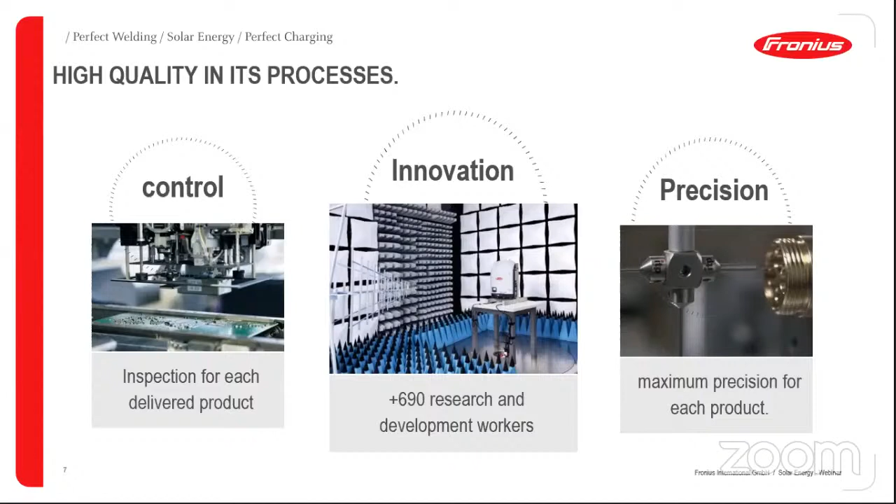So we have three very important pillars in our process: control, innovation, and precision. We ensure maximum precision for each product across all our business units. We have more than almost 700 people dedicated to the development of our products. And for sure, what is more important for us is the precision in all the products - when you receive the inverter, you will receive a product that has been inspected and has passed through a very rigorous process to be ready for work.

Now I also want to present a few numbers about the Caribbean. We have installed, or registered, more than 1,000 PV systems in SolarWeb. Later on we are going to see what SolarWeb is and what advantages we get with this software. We have sold more than 3,000 inverters, and for sure this is not the real final number, because we know some inverters have been sold to Spain or Germany but then come to the Caribbean. So for sure we have more inverters registered or already installed in the Caribbean.

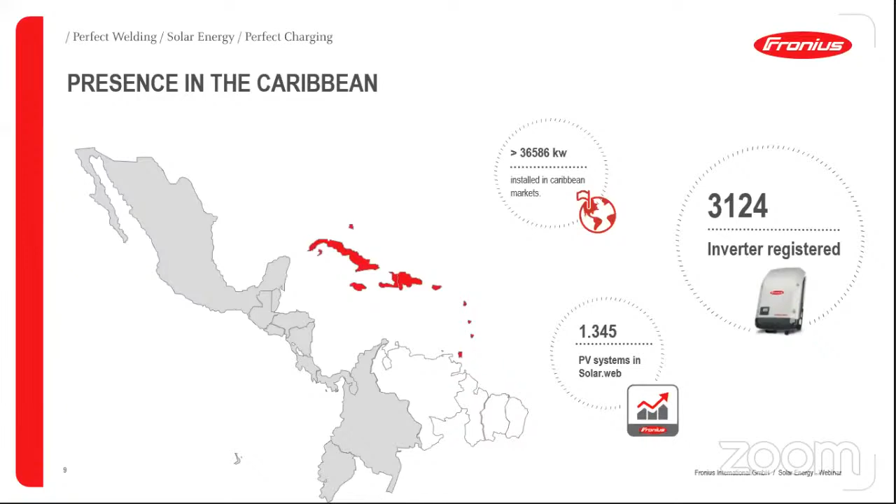So I took a snapshot from our system, and we can see here some projects around all the islands in the Caribbean. All these yellow points that you see on the map are the projects that are registered and that we can see in SolarWeb - so it's basically covering all the Caribbean. As I explained in the first webinar, all our products are very useful for the extreme conditions of the Caribbean. We know that we have very warm temperatures, and we also have conditions like storms that need a device that can support these extreme conditions, and Fronius produces this kind of inverter.

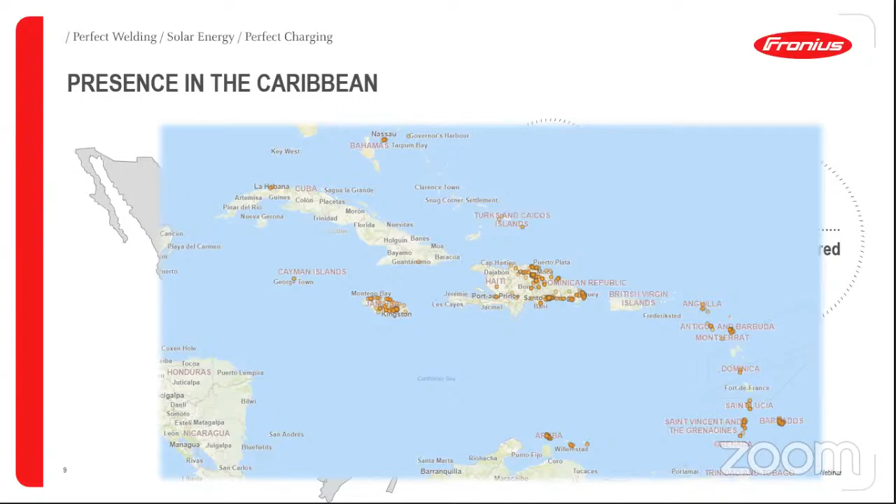Good, just to start this webinar, we are going to begin with the monitoring system. So basically what we are going to see is the final step of the monitoring process, and this is SolarWeb, where you connect the inverter to our software for monitoring and supervising. Let's see in this video a few characteristics about our SolarWeb, but later we are going to see on a real project how SolarWeb looks.

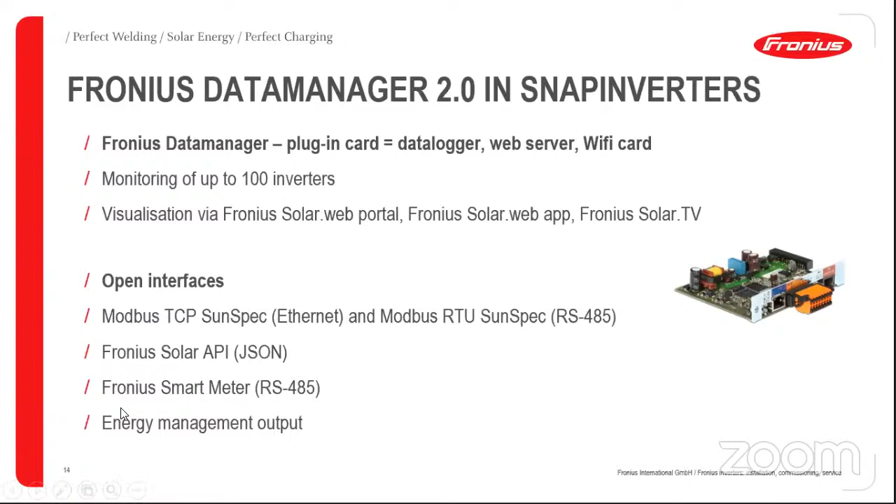With this data manager, you can also connect the smart meter, and you can do some power control, something we call non-feed-in or zero feed-in. For example, we can do this with the smart meter. And also we have open digital inputs and digital outputs where you can do some energy management, which we will see later on.

So let's see how this data manager looks in the inverter. This is a picture from the low part of the inverter where we can see all the sections. In number 1 and number 2, we have the connections for the SolarNet plugs.

This SolarNet is our internal communication system. When you want to connect more than one inverter in a single installation, you will do it using daisy chaining cabling through these ports. Normally, in every single installation, even if you are using just one inverter, you need to have these plugs connected to the inverter. It doesn't matter if you have 1, 2, or 3 inverters, you always need to have these plugs connected. Of course, if you are using 3 inverters in one installation, you can connect them using cabling, but always keep in mind that these ports need to be connected.

Also, we have this USB interface. With the USB, you also can record some data, or you can do a local update of our systems if it's needed.

Number 5 is the WLAN. It is needed when you want to connect the inverter through Wi-Fi. This antenna lets us do it with these Wi-Fi connections.

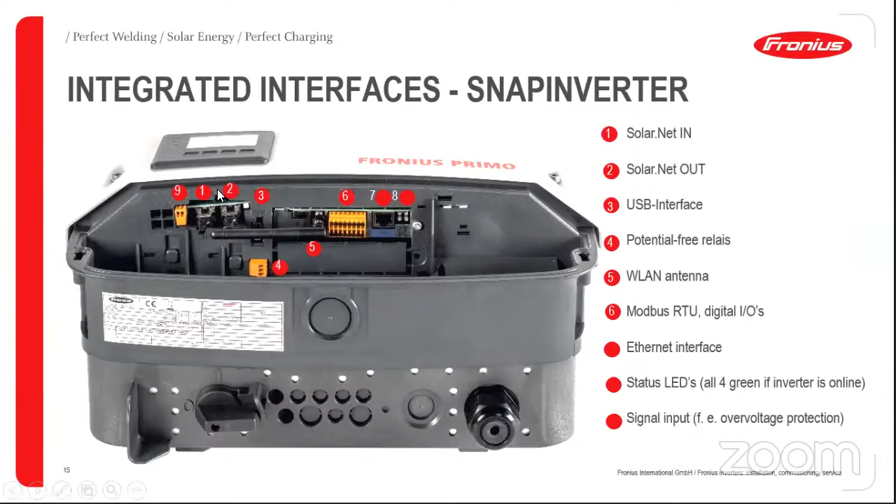For example, you can connect an over voltage protection, and when this protection is active, it will give us a signal so you will know that the SPD is active, which is very important, and not all devices can do this.

I mentioned that we can connect more than one inverter in a single installation using just one data manager. We can also do it individually, so each data manager will send the data to our router, but we also have the option to connect through the SolarNet links.

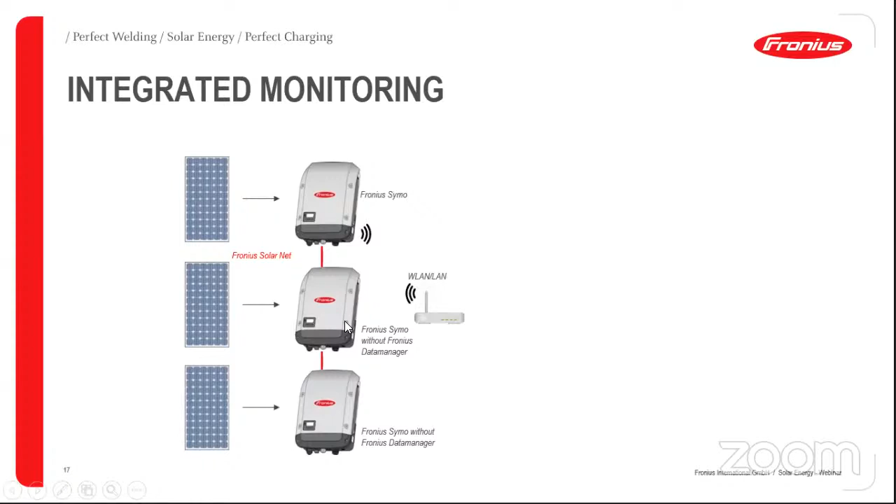In this option we have a master inverter and 2 slaves, where all the data is sent to internet just by the master inverter. In this installation, only one data manager is needed, and the second and third inverter don't need the data manager, so you can save some money when you buy the inverters.

Then you can see and check all the data using our Solar web portal, or also our Solar web app for the cell phone.

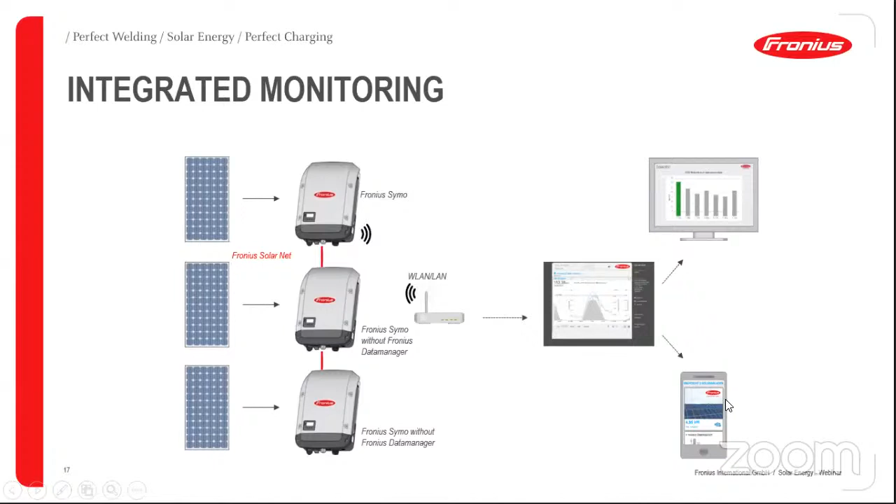So how do we do this ring connection? As I said before, we always need to keep in mind that these terminals need to be connected to the first inverter. Then we use cabling with Cat5 connections between the first inverter to the second, and then until the end of the inverters.

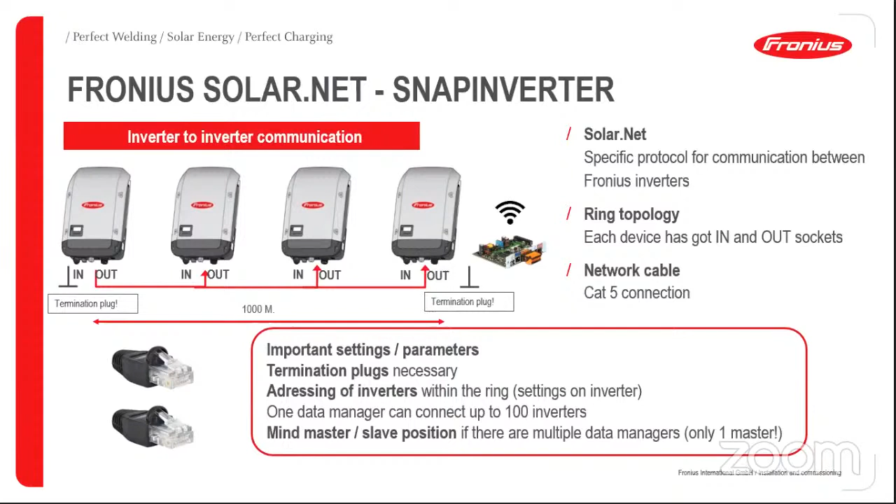In the last one, you need to put the terminal on the SolarNet output. Please keep this in mind because it's one of the most common mistakes when we do this connection. So after we do this cabling between the inverters, then we just need to start our Fronius.

That's it. They will start producing. So let's see how it should be working.

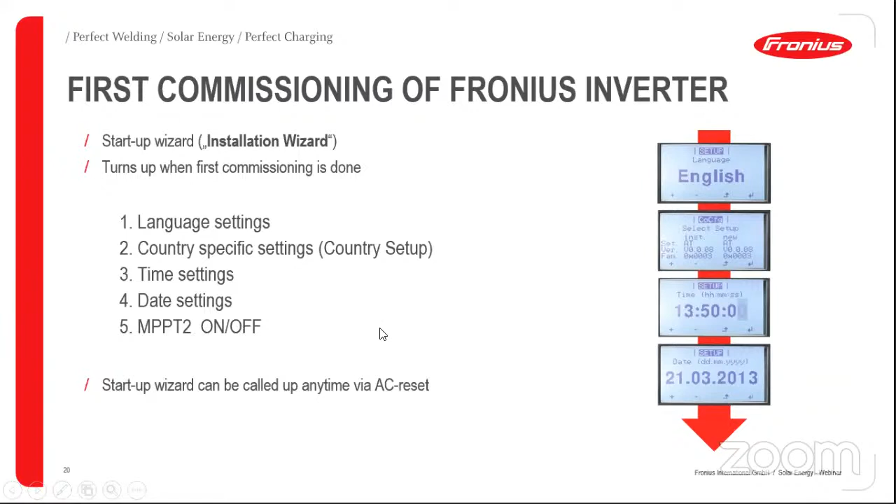Also, there are other options that need to be set in this commissioning, like, for example, if you have a second MPPT in operation or not, you should select the correct option.

And that's it. After that, you just need to start the Wi-Fi access point to connect the inverter to SolarWeb. So how is this process?

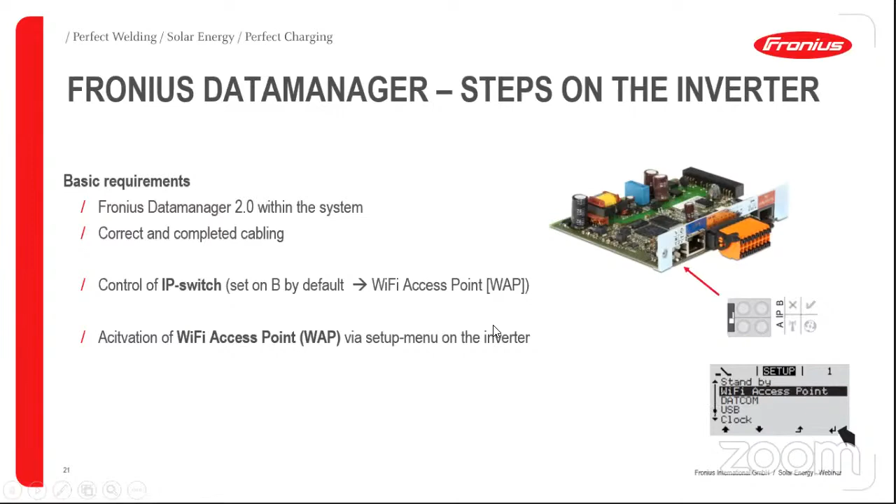You just need to move in the display of the inverter to the setup. Then you start the Wi-Fi access point. When you select this option, it will give you the possibility to connect any smart device to the inverter.

For example, I recommend using a laptop. In the laptop, you will see in the Wi-Fi options the connection to the Fronius data manager, which always starts with Fronius 240 dot another 6 numbers.

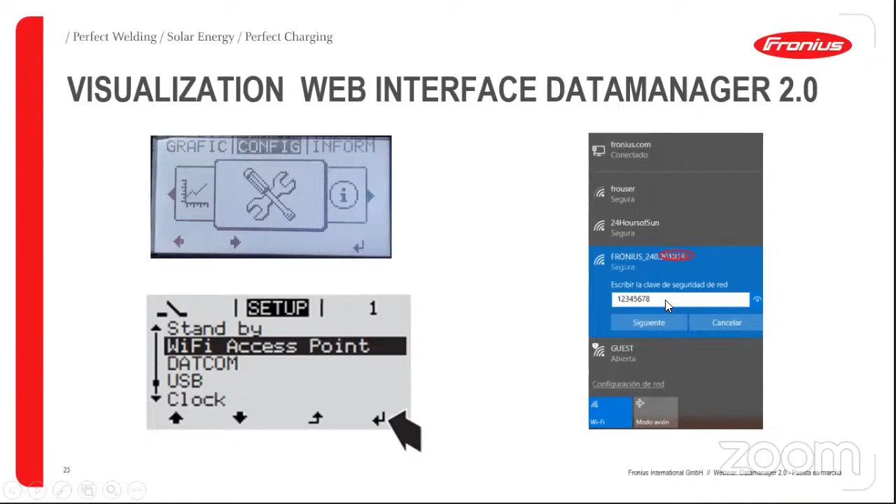They will ask you for a password. The password is always the numbers from 1 to 8, so it means 1, 2, 3, 4, 5, 6, 7, 8. And then you can start the process.

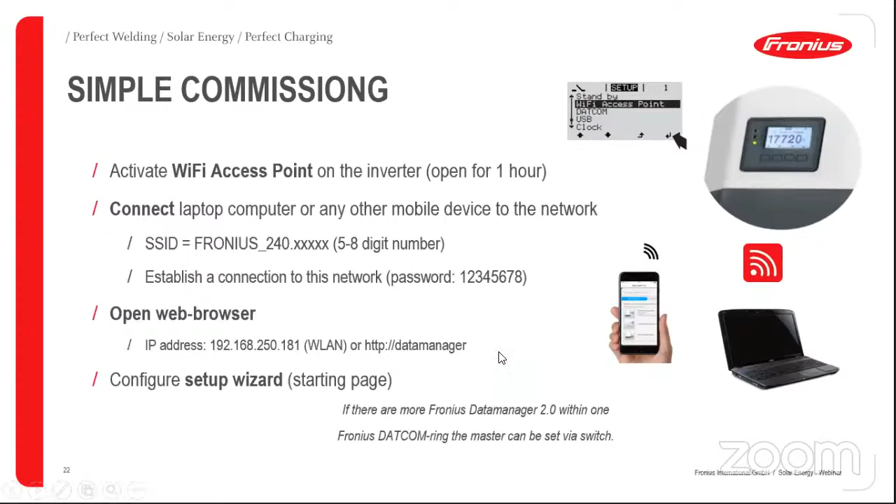Then you have to go to your browser and type this number that is here, I will highlight it for you, slash data manager, and it will bring you the possibility to connect through your laptop to the data manager itself.

So in your laptop, this wizard will appear. You can select either the SolarWeb wizard or the technician wizard, but I strongly recommend you use the Solar Web Wizard.

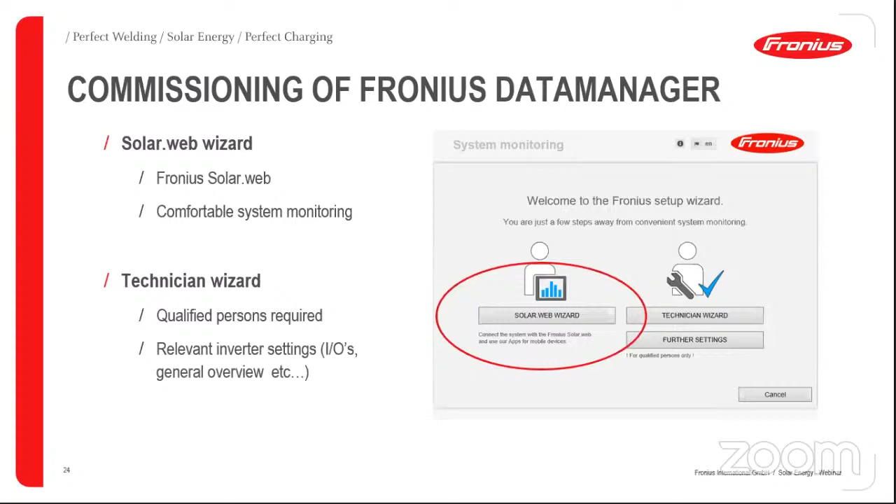What is the difference? When you use the technician wizard, you need to fulfill all the steps and requirements in the installation, but sometimes that's not needed. For example, if you're not going to do load management or control active or reactive power, it will still force you through those steps, making the process longer.

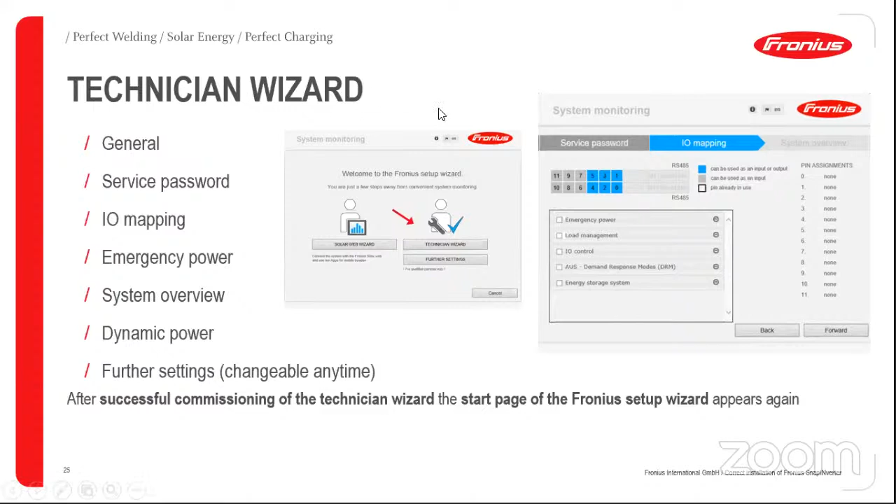So again, I recommend using the Solar Web Wizard, which will guide you through the basic steps, and if later needed, you can enter the interface and complete the process or select another option that wasn't set up with the Solar Web Wizard.

When you start this option, you'll see some basic steps where you need to fill in some data. For example, the name of the installation, how much DC power is installed, which system time is used, and the network setup—whether it's Wi-Fi or LAN, static or dynamic address.

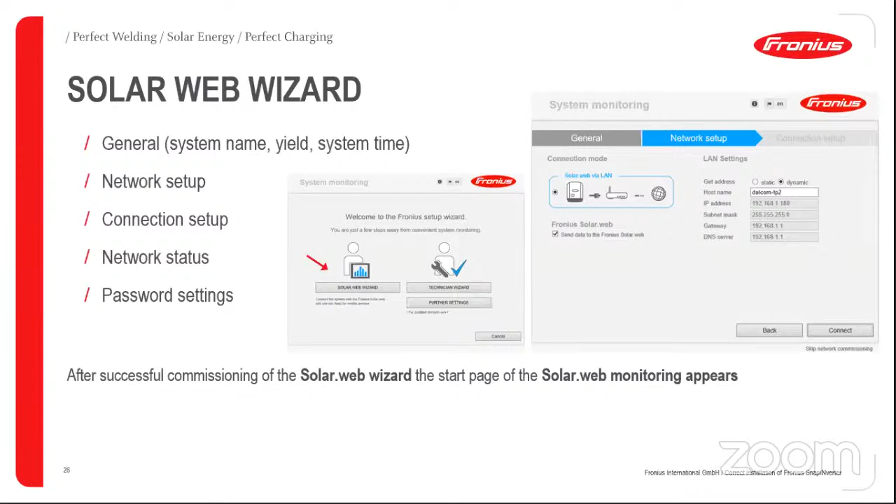Of course, you need to set up a password. My recommendation here is don't forget this password, otherwise you need to contact us. We will provide you a second password if you forget the one used in the commissioning process.

If at any step during commissioning you make a mistake or want to go back, you need to enter the code 78278 on the inverter. To do this, press the third button from left to right five times. Five zeros will appear on the display, so you can enter this code on the inverter and continue with the process.

With this number, 73887, you have the option to only change the country setup. For example, if you need to change from 60 hertz to 50 hertz, or from 208 volts to 240 volts, you can do it using this access code.

But if you want to start the full process, you need to use the code we highlighted for you, the 78278.

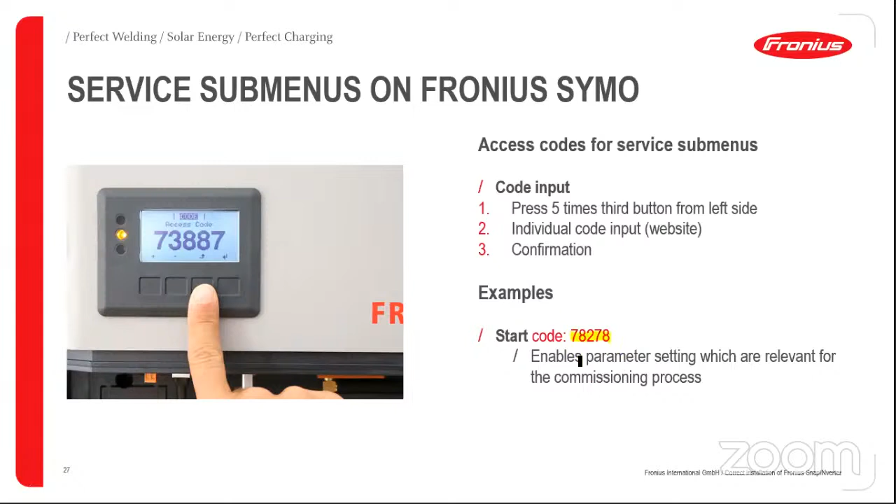Good, so we have already installed all the hardware, we already set up the commissioning process, and we have already connected the inverter and the data manager to the internet.

So then we can also install our smart meter. What is the smart meter? It's our bidirectional meter that can see all the consumption and production in the installation. You'll see the consumption in your house or company where the inverter is installed, and also how the grid is sending energy or how you are sending energy to the grid. That's the possibility we have with this bidirectional meter.

We have meters for 50 hertz and 60 hertz, so depending on your country, there are different smart meters. Always keep in mind which grid you need or in which grid you're going to install the smart meter, so we can support you in selecting the best one for you.

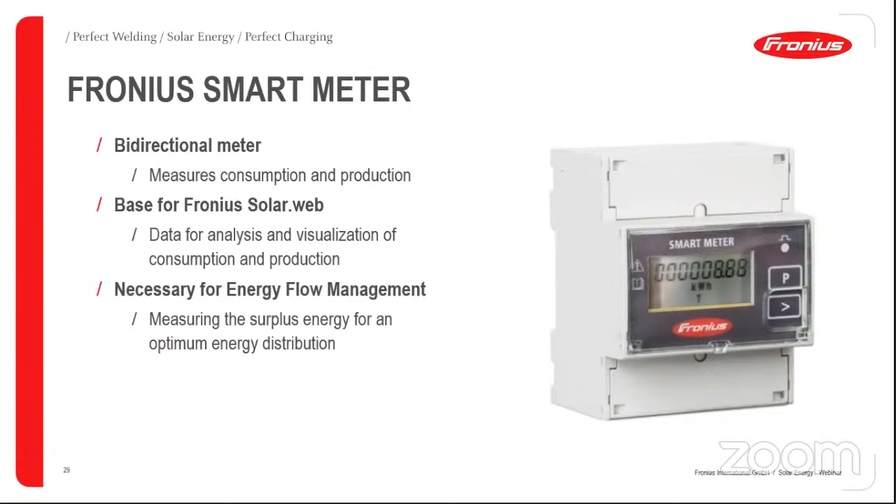Good, so finally we get to the Solar Web. Let's see this on the internet in a real project.

Carlos, I have a question. Are you already seeing my screen on the internet? Yeah, we're seeing it. Okay, cool.

Good, so this is the Solar Web software. This is the portal where we can do monitoring and support. I was having a problem with my connection, but yes, we can see it and everything is okay.

Okay, no problem, thanks. So in these installations, I registered myself with my email, so I have access to these projects, but you can also have a lot of different projects registered under your name or your company name. Let's see one that is right now in operation.

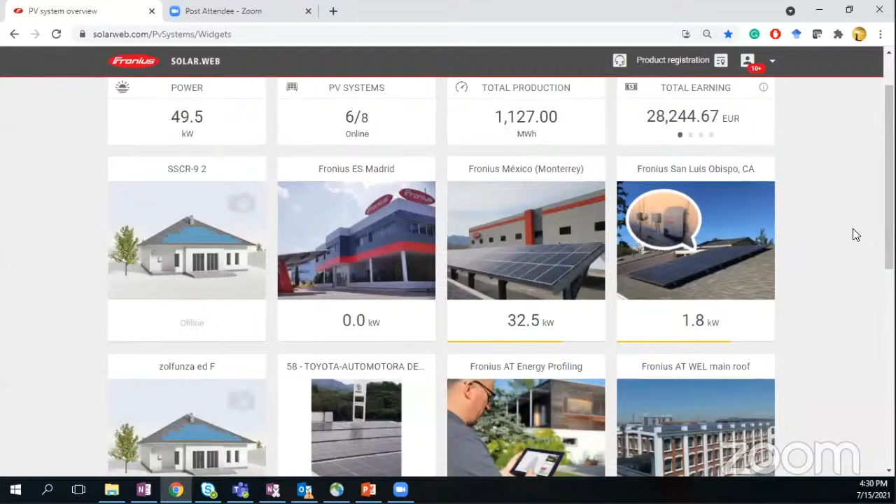For example, let's see this Fronius Mexico installation in Monterrey. You can see the current power right now at the site, which is the offices of Fronius in Mexico. Here we can see, for example, how much energy is produced by our inverters. It says almost 32 kilowatts, which accounts for 73% of the total DC power installed.

So one nice option that we have here is the production and consumption side, when we can see how this energy or how everything is happening right now in the installation. This blue line is showing us the consumption that is right now in the offices. For example, we can clearly see that they start to work at 7 a.m., that they start with some computers, air conditioning system, and we see clearly the increase of this consumption.

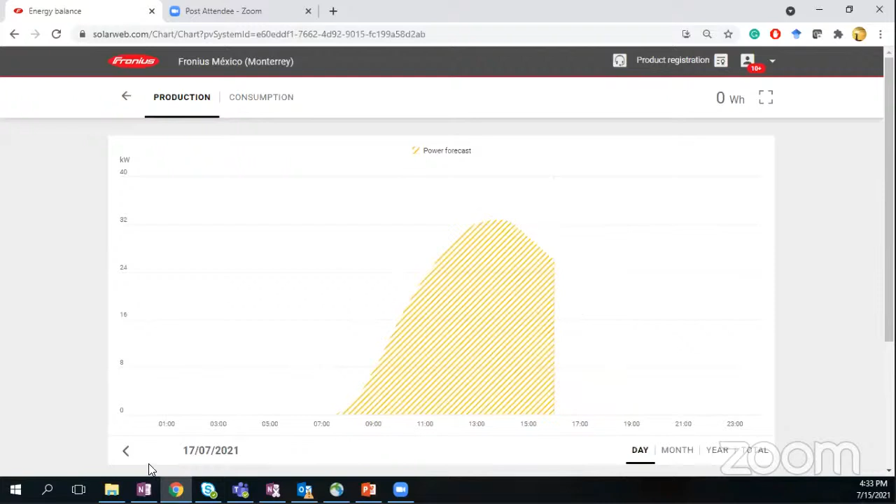And also a very nice option that we have is this power forecast. So it means how much energy we think that the system will produce by the rest of the day, but also for tomorrow and the day after tomorrow. So we can see this with 2 days in advance. And this is possible because we have this weather station agreement with some companies, so we can somehow guess how much energy we can produce.

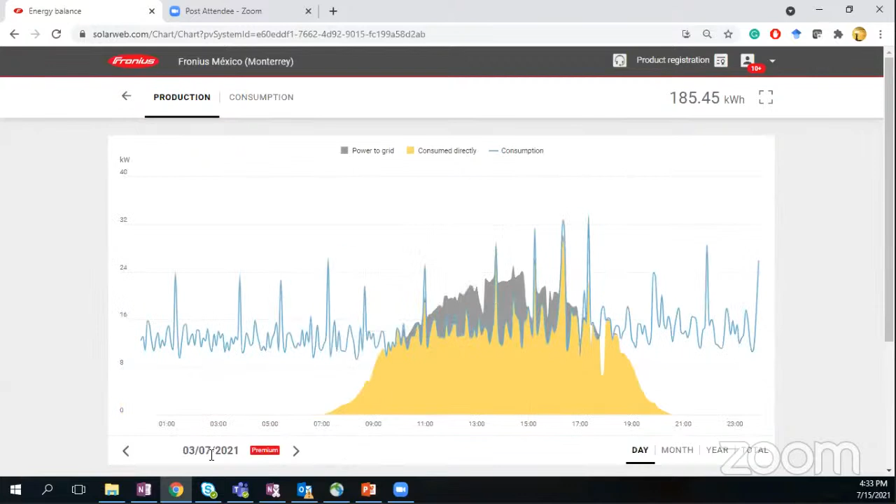With this energy balance, we see all the production from the start of the project. So let's see this day, because you can already see some small amount of energy that is sent to the grid. Here, for example, we see a power that was sent to the grid 2 weeks ago, and the production of energy exceeded the consumption. So this system also sent energy to the grid.

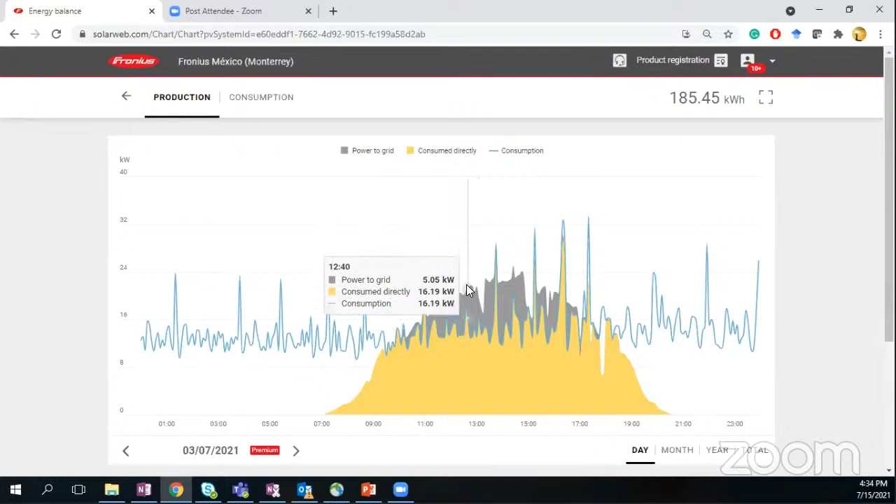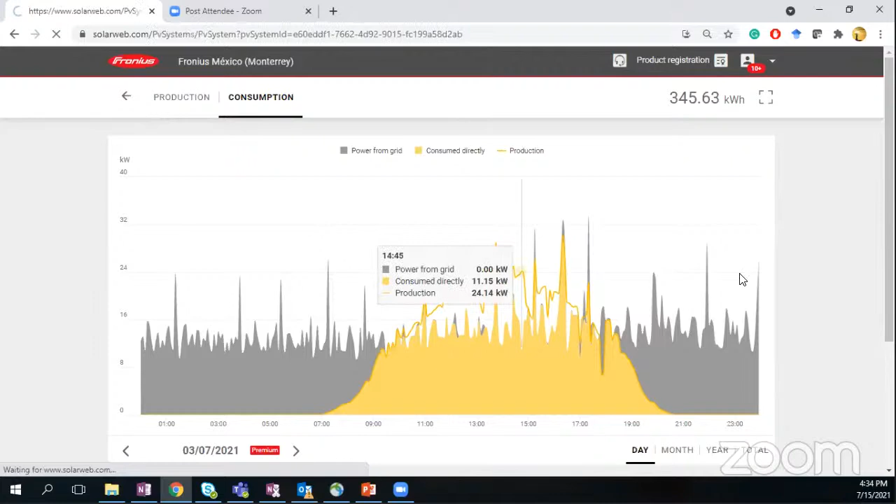Good. So let's see what other options we can see here in this solar web portal. And here we can put some other data. For example, in this currency, maybe it's because it's set to zero that we don't see the total amount. Yep, it's in zero. So we can change the currency and we will calculate the amount of money that the project is saving for using the solar system.

We also can change the orientation of our modules, and we can add multiple orientations if needed.

In this portal we can also do software upgrades if there are some available. For example, with this data manager, the system will check if there is any update that is available to install. We just need to click, select the option, and update the system. It's also possible with the inverter, so if any update is needed, we can do it using the portal. Of course, what is needed is that the system is connected to internet and has a very stable connection. If the process fails, then we need to go to the inverter and update the system using a USB. That is pretty simple as well.

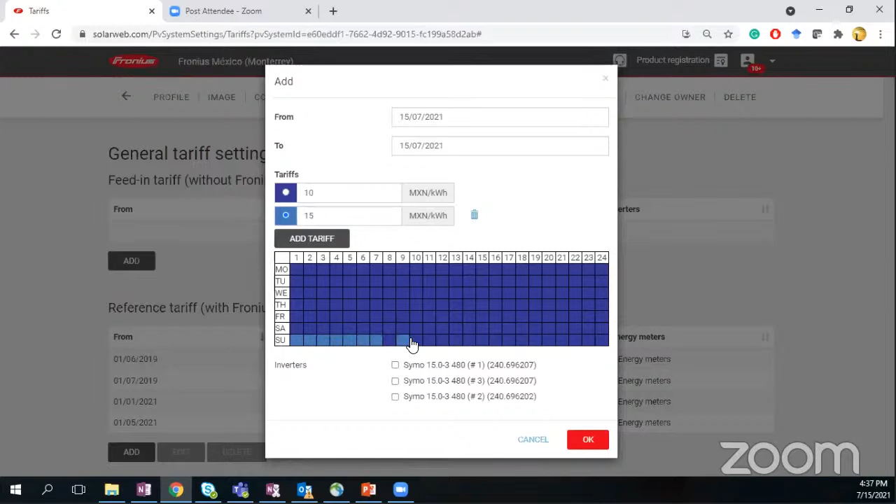Let's assume we have 10 Mexican pesos and another 15 Mexican pesos, and these 15 Mexican pesos only apply on Sunday - it's just an example. So we can select different tariffs, and the system will give you very detailed energy savings and money savings.

Another very important and nice option in this portal is that you can create reports. You only need to select which report you want to have. There are already some basic reports pre-established in the system, but you can also create your own custom report if needed. So maybe you need a report of the reactive power in the system, and you want to have it daily, so you can create this very easily, and that's it.

To receive these reports, you need to add your email in these settings and contact options. So for example, in this project, only three users can receive the report. I'm one of those who receive this report - actually I'm not, because I selected that I don't want to receive it, but maybe I want to, so I just click here and I will receive daily all the reports created for these installations.

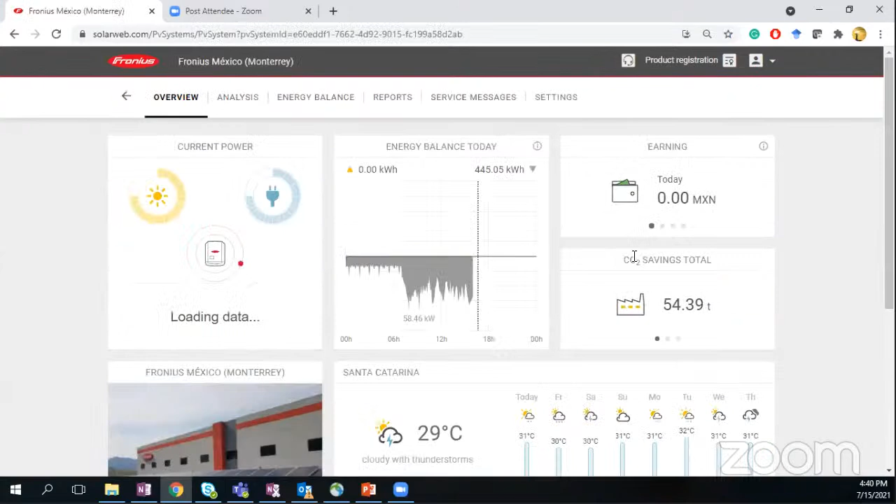Finally, one nice option that we have in this portal is the history. Here, you can select any of the inverters in the installation, and also the smart meter if there is one. With these devices, you can check, for example, how much power per MPPT or the total power, or any different channel you want to see, from the first day the system was installed.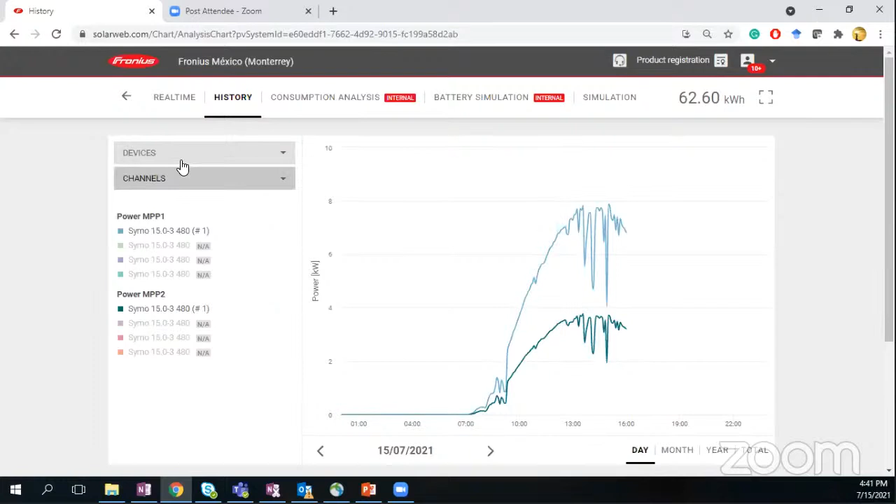So maybe we need to compare the difference between two inverters, or we need to see if one of the MPPTs is working correctly. So we come to this option, we select the device, we select the channel, and we see how this option is operating inside the inverter.

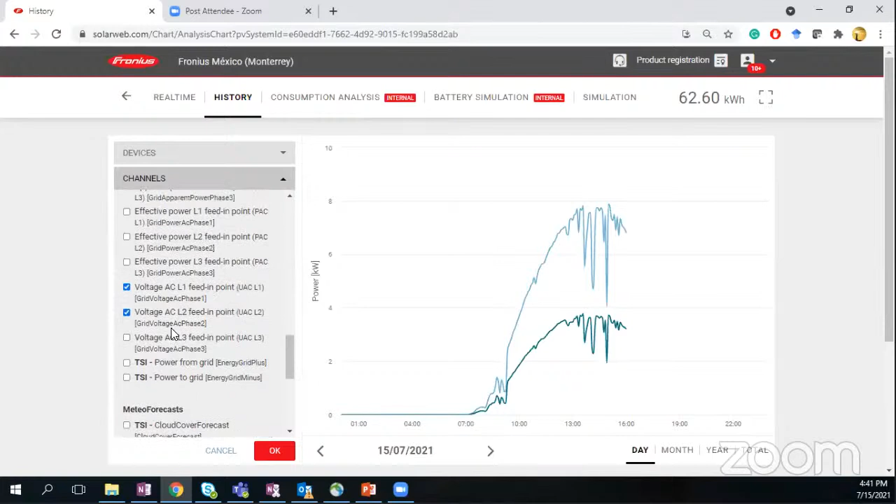Also very nice, for example, we can select the smart meter. As I said before, this smart meter will let you check not only the production from your PV system, but also the consumption and all the energy flow coming from or going to the grid. With this option, we can also check the voltage in the phases from the grid.

So we can also have a small grid analysis in your system. Let's see what happened with the grid today. It started, for example, at 252 volts, but then it increased the voltage, and finally decreased to the lowest level in phase 2 of almost 250 volts.

This is very important because sometimes in grids that are not that stable, the inverter can disconnect easily because of this difference in the voltage from the grid. So with this system, with the smart meter, we can check what is happening and what needs to be done in the installation - maybe we need to change the tap in the transformer, or do some other electrical configurations.

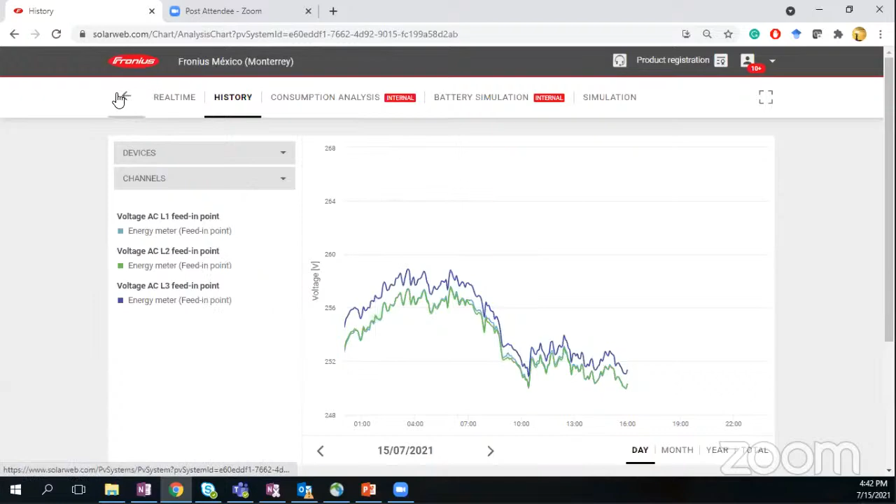Something I want to show you is this option here. One is the Solar TV, and the other is the Solar Configurator. With this Solar Configurator, you can select and design your system using this software. It's also for free, and here you can see all the modules from the companies that produce them.

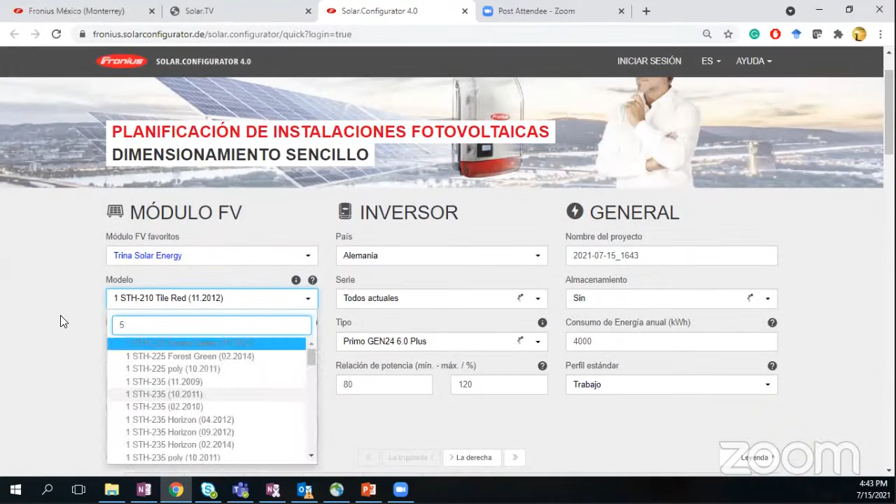So for example, let's see Trina Solar, and you can select all the modules that are available right now - let's say 335, 330, I'm not sure exactly which one. With this software, you can see the best option for your system and how the connections should be done.

So for example, let's select Jamaica, and let's see a project with Symo, and with Symo, for example, let's wait till it's ready.

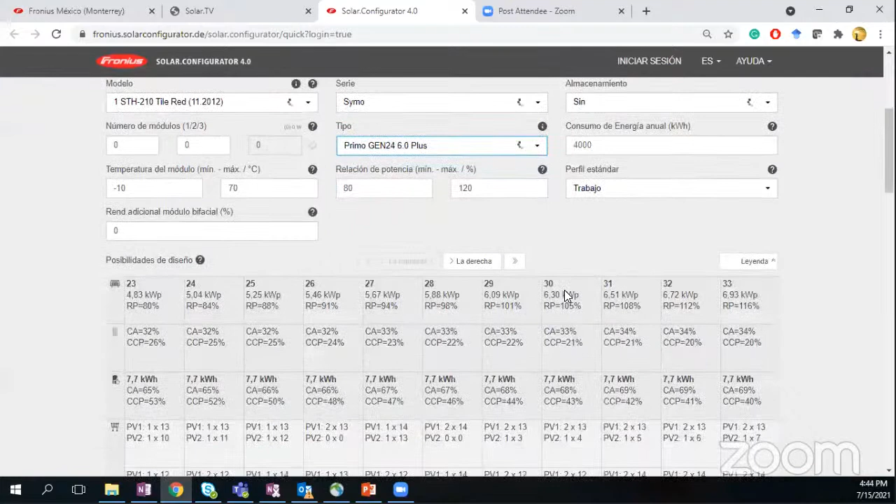Good. So we want to use a project using the Symo 20 kilowatts, and we want to use Trina modules, 535 Vertex.

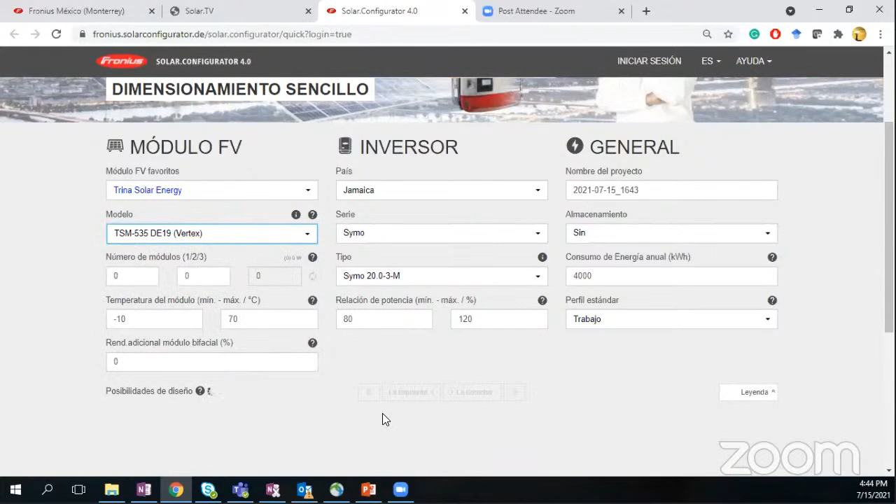So the software will show you the possibility to see which is the best configuration. Also, you can see here the different languages. You can change to the one of your preference.

But very important here, you see the inverter ratio. What is this? In Fronius, you can use more power on the DC side, so we can oversize the inverter up to 150%. For example, I will choose 150%. We already selected the module and the Trina factory. We are assuming a project in Jamaica using our three phase inverter Symo.

And let's see what the software recommends us for the connection. Okay, meanwhile the system is finalizing the calculation.

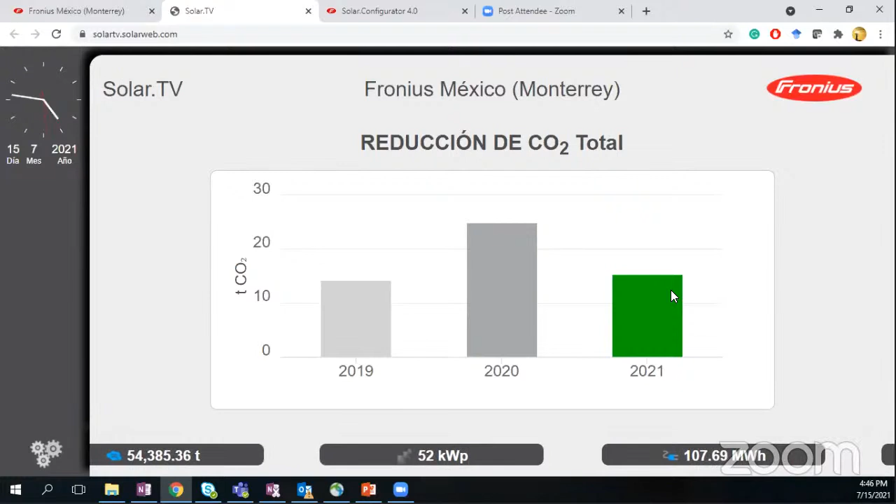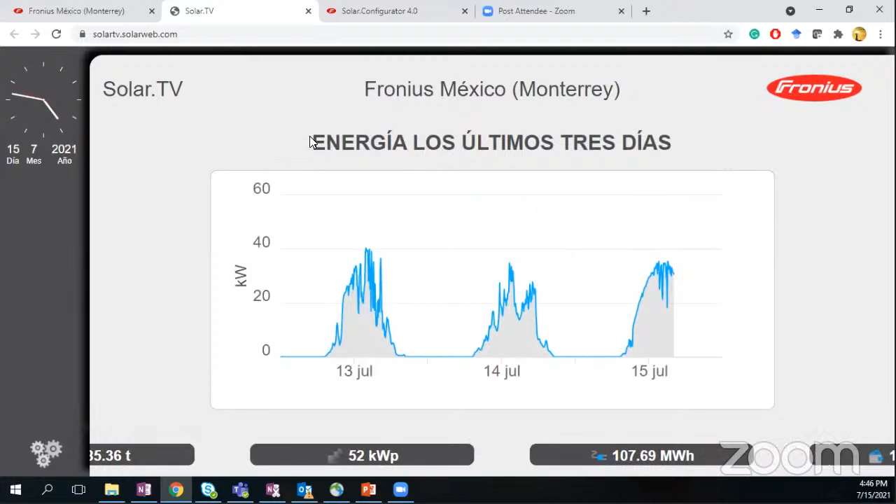Let's see this Solar TV. This option is also for free. This is an option for you to show the production or different data from your system continuously on any television, laptop, or wherever you want to show it. So for example, you are with your customer in the lobby or in the office, and the customer wants this data to always be shown on this television. So it's pretty simple, you just need to go to Solar TV. It's for free. You can also select different parameters that you want shown.

So for example, I select Fronius Mexico. I want to see just the production of energy in the last 3 days. Maybe it's better if I select 30 days. I also want to see how it's working this week. Also, I can add the logo of the installer, and also some image from the customer, and that's it.

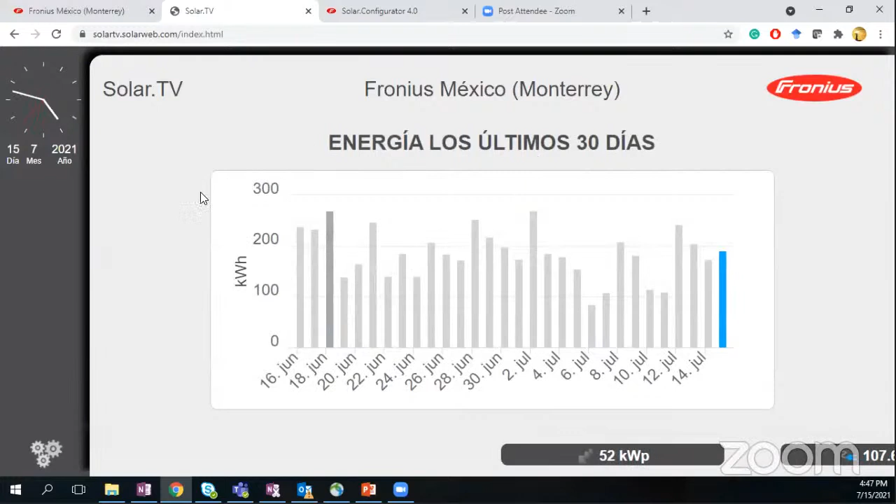And the system, as I said, will show you this information. You can also select different or more installations, and it will continue showing this information. Good.

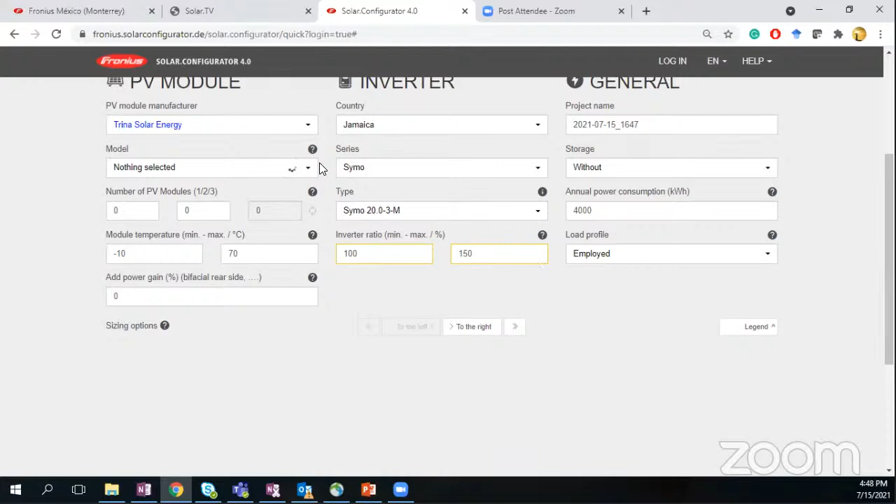I don't know, Carlos, if we have any question. Maybe for the moment, while we wait for Camilo. Okay, so now we have the calculation.

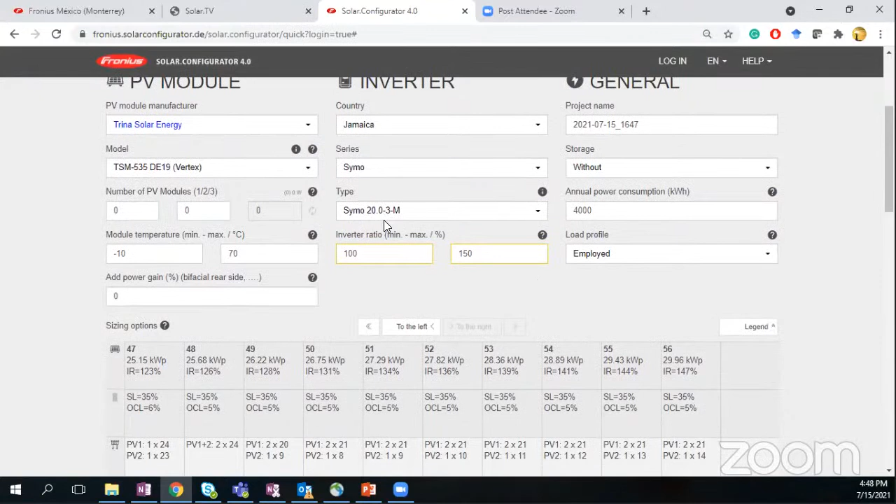As you see here, we can connect to this inverter up to 56 modules, which is almost 30 kilowatts in DC power with one Symo 20 kilowatts. So as I said, we are oversizing this inverter almost 1.5 times, and this system will show us the best option for the connection.

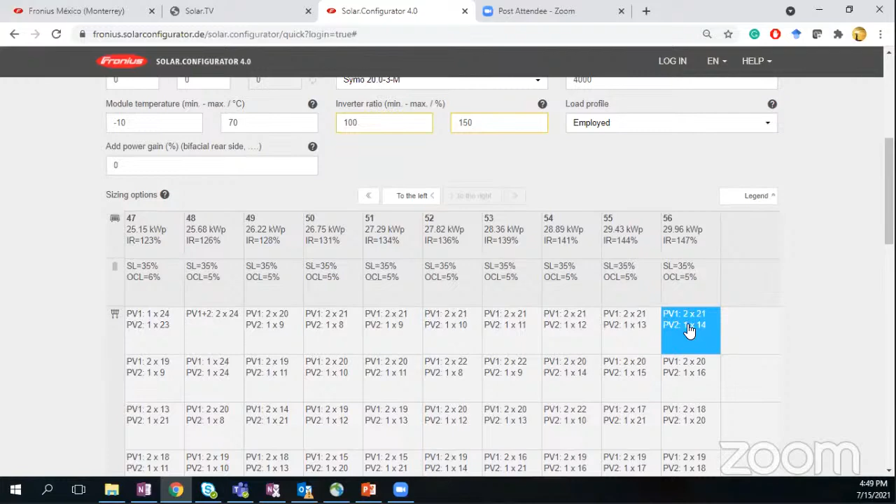So for example, we can use 21 modules in the first MPPT for each string and 14 modules with one string for the second MPPT. We can also create a report, and then we can add it to the memories from the design of the system.

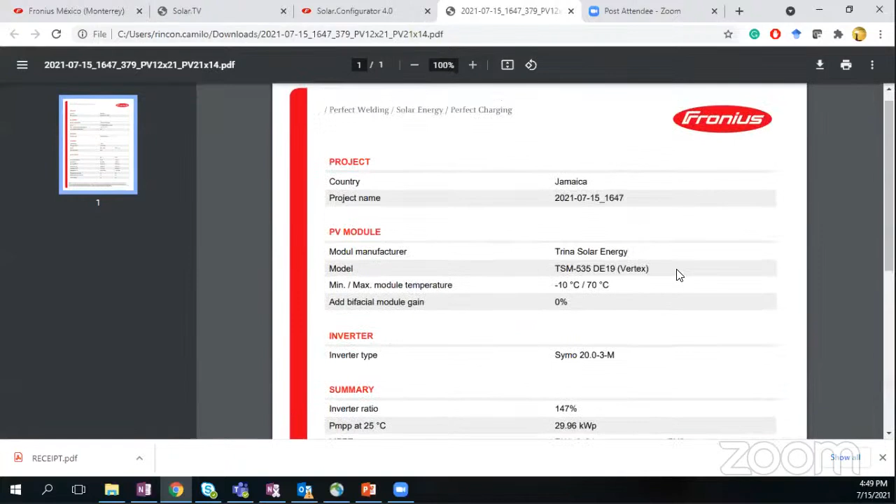Good, so this was the software that I wanted to show you of our system. I don't know if we have any question or something that Mako wants to add in this webinar.